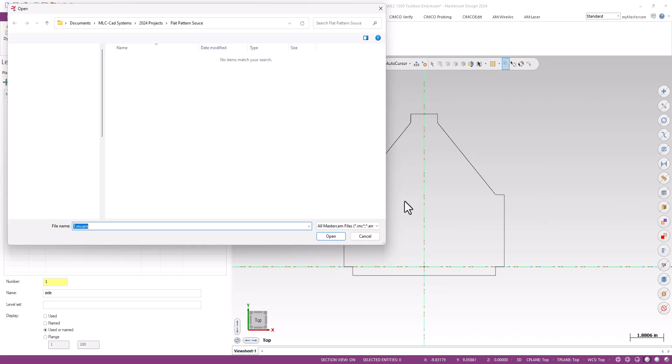So what I've got in front of me is just Mastercam 2024, and I'm going to go ahead and drag and drop in the first of our DXF files. It looks like that's the side, so I'll call that the side of the part. We'll do some level organization while we're doing this. From here on out, I'm just going to do a merge and merge in some more files. So we're going to look for some DXF files here.

We'll go for the handle next, and I'll just merge that in. I will bounce it off to a different level here. If I don't do it here, I can always shuffle it around in my level manager, but if I can remember, I'll do that. I'll just offset those by 1, and we'll bring that in. And that ends up on level 2. That looks pretty good. Or level 3, I should say.

And we'll merge in the third and final of our patterns, and that would be the tray itself. Perfect. Again, we'll just offset that by 1. We'll green check, and then I'm going to save this as my source file. Now, I didn't get quite the level distribution there, so I should have offset that by 2. But that's okay. I've got an extra level here, and I can simply grab one of those pieces of wireframe and move it to the level that I want it to be on.

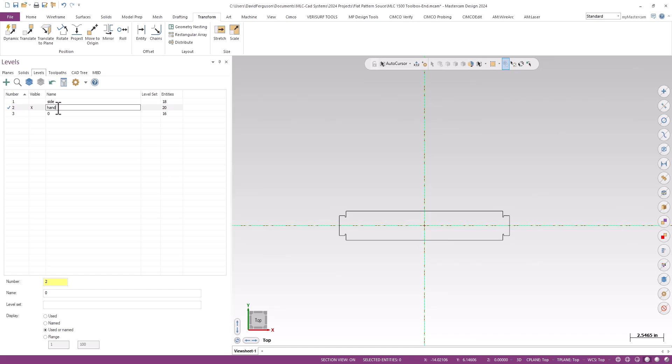There we go. And that would be the handle. Just doing a quick little label here so I can keep track of this. And then I believe that would be the base. Perfect. Now, I'm going to keep these on separate levels, and I'm only going to have one level turned on at any given time. These DXF files are flat to my top XY plane, so that makes programming them relatively straightforward. I don't need to do any translations or moving these around. I just need to keep the levels organized, so I'm only programming one at a time.

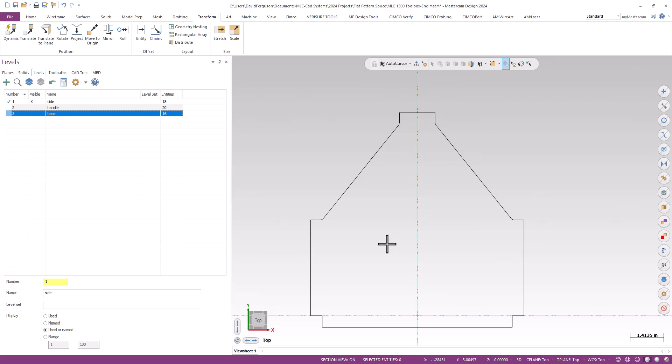What we're going to do is create a simple contour toolpath for a laser, water jet, or plasma style of cut. So I need to pop over to my toolpaths manager on the left hand side, go up to my machine tab, and pull in my Mitsubishi laser. We'll let that populate. Basically it's a mill, except it outputs for a laser. So we're using the standard milling toolpaths, so things like contour is what you'd use here.

Now for this, I want to set a specific entry for this toolpath, something I'm going to need to do for all 3 of these before I save them out as source. So in my level manager, I'll make sure that I am on the correct level, and I'm going to go up to my wireframe ribbon. I'm going to create a point position. I'll just make sure that I'm making regular points, and I am.

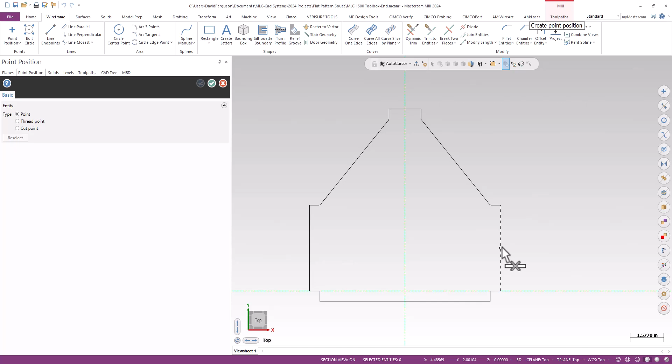Go up to point position, and then I'm going to hold down my shift key right here about the midpoint of this line while I click. So shift click, which brings up my little dynamic gnomon. I can grab that and move it, let's say a 1/4 inch or a 1/2 inch. I'll go a 1/4 inch, positive X, enter, enter, enter. And then that point actually gets placed relative to where I clicked.

Anytime in Mastercam, for quite a while now, if I need to locate a point, or locate an object or a depth based on a point, if I shift click, I can then use that gnomon to adjust relative to where I'm going.

So now that I've got a good sort of entry or burn-in point for my laser, since I don't want to start it right on the edge of the part or that contour, I'm going to pop back over to my toolpaths manager. I'm going to go up to my toolpath ribbon, and I'm simply going to grab just a simple 2D contour. This is a profile, burn, or cut, however you want to call it, and that's really all I need there.

So I'll go ahead and start off with a contour, and since I am using an entry point, I'll start with a point chain, and I'll select that point that I created. Then I'll switch to just a regular closed or looped chain, and I'll put a clockwise motion on there. Okay? Now I'll make sure in my lead in, lead out that I'm picking up that entry. I might have to adjust the start point otherwise, but we'll see what we get. I'll go ahead and say OK.

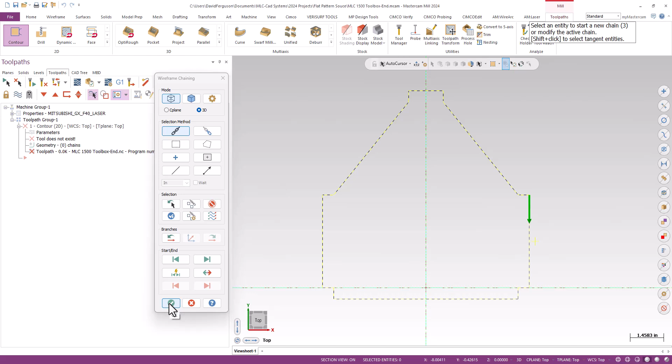For a tool here, I don't have a special tool is what I'm getting at here. So I actually need to create a real simple tool here to sort of mimic the diameter of the laser, or the nozzle of the water jet, or the diameter of the plasma, just so I get a realistic view in backplot and verify. So I'm just going to right click and create a very quick tool.

This will just be a flat end mill, and believe it or not, the cutting diameter of this tool is going to be 4 thou. And if I zoom in, it is there. There is a 4 thou tool that's going to, again, mimic what my laser looks like. I'll just give it a slightly better name. I'll just call it laser. You can get more specific down the road if you want to, but we'll just call it a 4 thou laser. Okay, perfect.

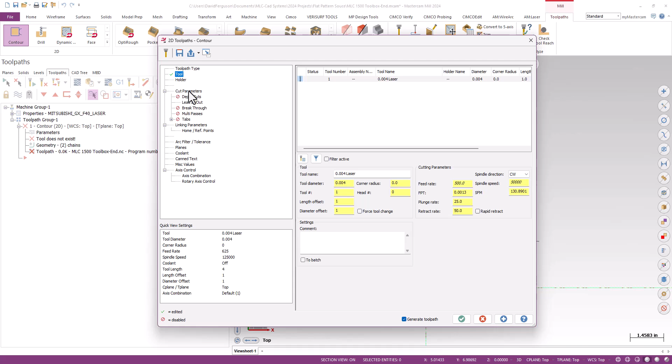I'm going to go down to my cut parameters next, and I'm just going to set this up as a real basic 2D contour. So computer comp is fine, comping to the left, 2D contour, no stock to leave on the walls or floors. One thing I can do with a laser is I no longer need to roll the cutter around sharp corners. Not as much a concern. So I'll just put that to none. So I'm okay making my good 90-degree corners. No depth cuts, no breakthrough, no multi-passes, certainly no tabs.

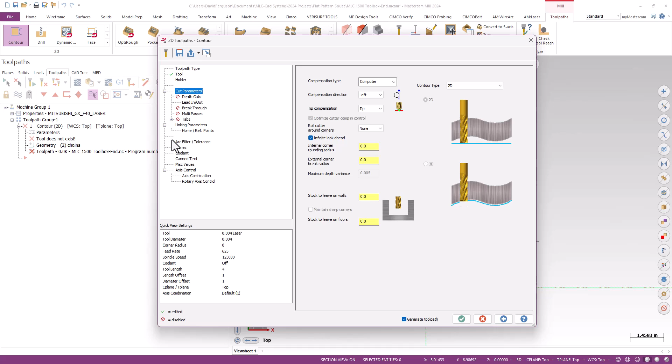And I do need to look specifically at my lead in and lead outs. So I'm going to turn off the exit entirely, and I certainly don't need any overlap. And I do want to use an entry point. Since I chained that, I want to make sure that the toolpath is picking that up. Now, I'm fairly certain that I placed the point to the right of the midpoint of that line. So I'm going to leave enter and exit at midpoint on closed contours turned on to see if I get a straight across move there. If that's not working, I can just adjust the start point relative to that point, so I'm not moving in in a diagonal motion or an undue amount of distance.

Finally, for linking parameters, for the most part, top of stock and depth can both be at 0 and incremental. That's perfectly fine. Feed plane and retract just need to be high enough to make sure that the nozzle or the aperture is going to clear anything on the top of that table. And 200 and 250 thou should be plenty. This material is not terribly thick.

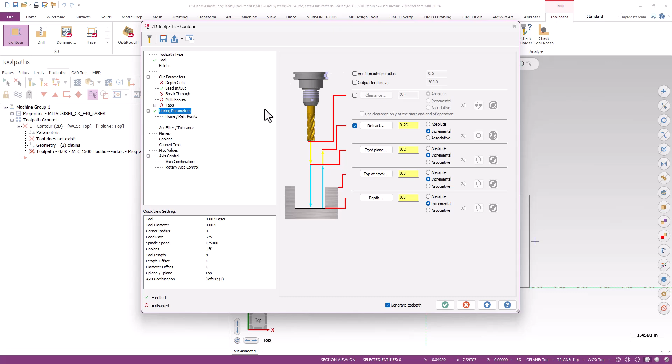So I'm going to go ahead and generate this first toolpath just to see what that's going to look like. I do believe I am seeing, if I zoom in here, yeah, I'm getting a nice straight move from my burn or entry point straight over and then into the contour. And that's what I wanted to see there. I'm not moving to the start of that entity. I'm moving right to the midpoint. So that looks pretty good. Again, I'll do a quick backplot on that.

I'll turn off my holder since it's slightly blocking my view and might make the tool hard to see. We'll step through backplot really quick just to make sure we're tracking. The graphics will tell you even if you can't see the tool, and that looks pretty good. Very satisfied with that, so we'll exit backplot.

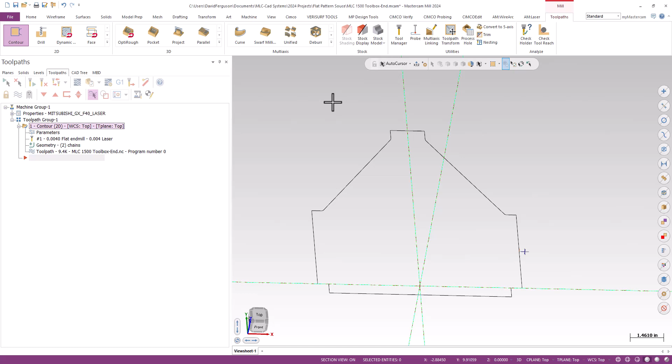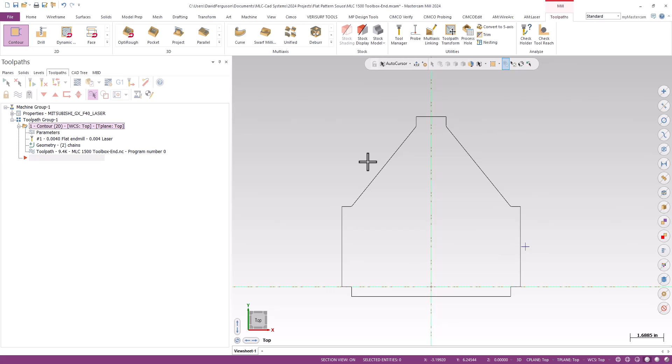I'm not going to post out code or anything specific. What this is going to be is a source file. The actual nesting, when we're determining quantity and all of that, happens in another part file - this one is just to get me going. The nice thing about source file programming is, down the road when I have to do another sheet or another run, I have all those source files available, and I'm just determining quantity and priority for how many of each I'm going to need.

So with that toolpath saved, I'm going to do a file save as, and put this right back where I got it from. I'll call this one the end piece, and tag it as a source so I can find it again easily. There we go, and I'll go ahead and hit save.

Now what else I'm going to do is leave this toolpath as is, and just do some quick rechains rather than rewrite. This part file is all about generating those source files to use later. So I'm going to go to my levels manager and switch over to level number 2 - that's my handle. I'm still seeing the toolpath from the other one there, so I'll make sure that's my active level, then go up to my wireframe ribbon.

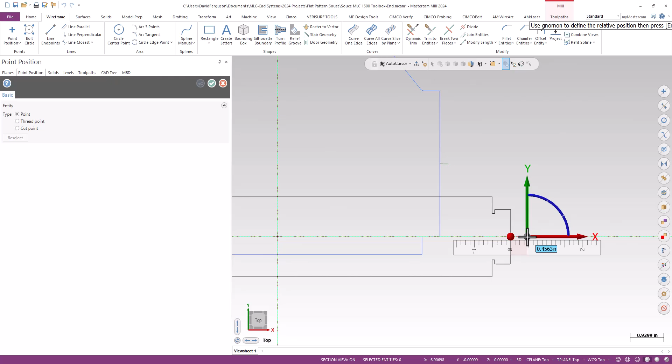Again, a point position, and I'll do that quick shift click since that worked okay. We'll go about a quarter inch positive in X, and there we go - there's my burn-in point. Now since I've got this first toolpath all sorted out, basically all I really need to do is rechain it.

I can do that a couple different ways. I can click on the geometry button to get to my chain manager and rechain there, or I can go into the parameters for the toolpath, go up to toolpath type, and click chain geometry there - either way gets me to the same place. The toolpath will have to regenerate anyway, so it just depends on how you like to do that. One has automatic regeneration, the other you'll have to click one of the regen buttons. I'll probably do the first way.

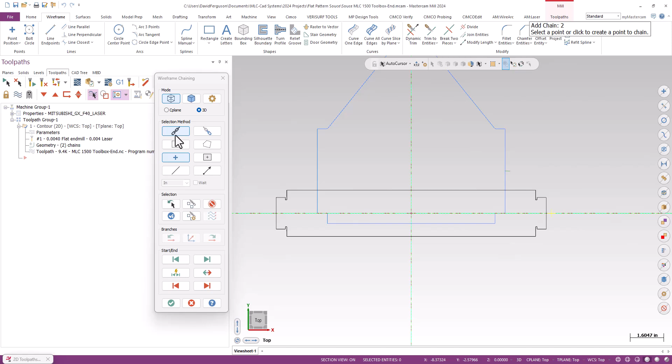So here I'm just going to right click and basically rechain all, dump the originals. Second verse, same as the first - we'll start with a chain point for my entry point, then switch to a clockwise closed chain around the DXF perimeter there. I'll go ahead and green check, and then green check out.

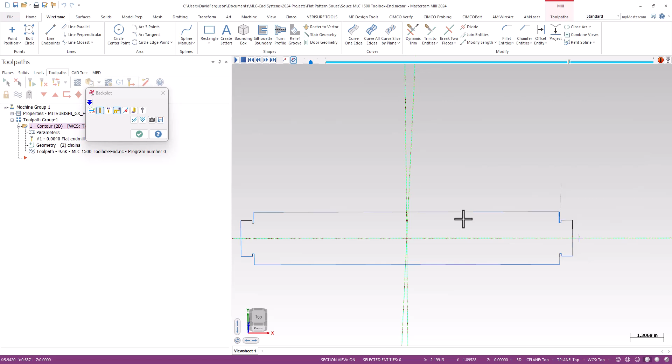I should see, if I look at that real quick in backplot - I'm just tapping my S key on my keyboard - we can see we are moving around that pretty good. A little hard to see the tool again, but it is there. That looks pretty good, all right.

Same kind of thing - I like that cut, so I'm going to do a file save as, putting them right back where I got them. I'll make sure I call this one the handle, so I can keep them straight down the road, because you will forget them - I know I do. So I now have that handle as a source file.

Switching back to my levels manager, switching now to the base. I'm still seeing the toolpath from the other one, but it's fine - it's just distracting, but it's not hurting anything to have it there. I'll make sure I'm looking at just the DXF file for the base, which I am.

Again, that is my active level as well, so I'm making sure I'm putting everything in a place where I can control it. Go up to my point position.

Again, shift click at the midpoint here, about 0.25. I suppose I could have used that point I created before, but I do like to keep associated geometry for toolpaths separate and together with their own kind, so to speak, just to make sure I always know what I used for any given toolpath. So for this last one, I'm going to pop into the geometry button here instead of parameters, just a faster way to get to the chain manager.

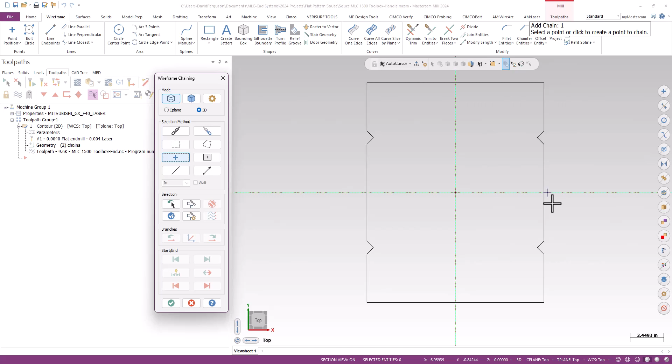Again, I'll do a quick rechain all, starting with a point and then switching to a closed chain to go clockwise. Green check. Now that toolpath won't regen automatically because I did that outside of the parameters, so I need to click one of my two regen buttons. I'll just click regen selected, and that regenerates that toolpath pretty quickly.

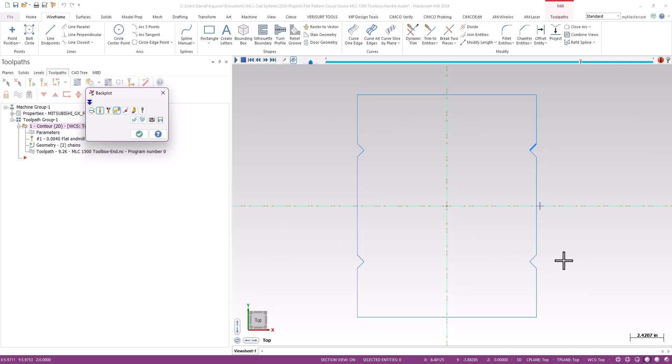Again, I'll check that very quickly in backplot just to make sure I'm happy with the toolpath, tapping my Sierra key, and you can see here we are moving around that. Hopefully that shows up on the screen, and that looks pretty good. So again, happy with it. All three very consistent toolpaths, basically the same toolpath, just rechained for three different basic outlines.

So this one, we'll go ahead and do a file save as, and this one I will change the name a little bit to base, just so I can keep them straight. And at this point, what I may choose to do is go ahead and do one more file save as, and save this sort of as the project master, toolbox master, master source, something, so I know this is kind of where everything originally came from.

I should probably spell that right, though. Try to spell correctly, guys.

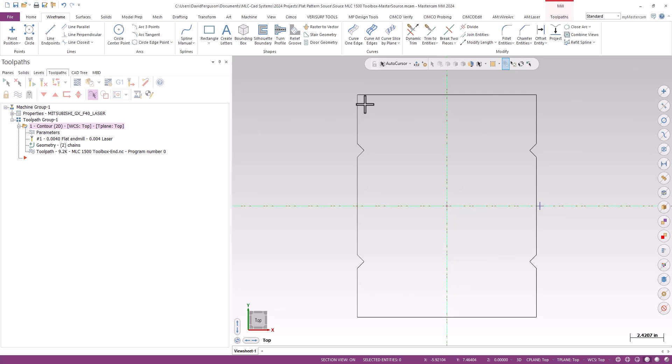All right, perfect. So now that I've got that done, basically I'm done creating those source files. So I'm going to switch over to a blank and empty session of Mastercam. I'm going to go ahead and load up my machine. So there's my Mitsubishi laser.

Okay, I'm not going into the machine group properties yet. I'm not selecting any tools or anything. This is going to be set up purely as a nesting operation. So once I've got a machine loaded in, I now have my toolpath nesting function available for mill. Yeah, even though this is a laser, it's still the mill module we're doing this in. So I'm going to go ahead and click on my nesting button here.

And the first thing it's going to ask me is to define the basic sheet. We'll just do 96 by 48 because that's just sort of the standard, and that's fine. But again, you can have all kinds of preloaded sheets in here that you need.

Grain direction, I can choose to ignore or have horizontal and vertical. So it just depends if this is wood, if this is metal that is grain dependent, and you want to stick with the grain lines up a certain way in the sheet, you can have that. So I'm just going to leave that at ignore for right now.

Nesting corner, in this case, will be the lower left, but again, I can set that to any of the square corners of my sheet, just depends on where I'm touching off. Most large tables or gantry machines, it's lower left, that's pretty common. Multiple corners, in this case, off.

A fill direction. Sheet to sheet distance, if I've got multiple sheets, is there a space between those sheets that I need to take into account? And of course, a sheet margin, so how close to the edge of the sheet am I going to allow the nesting to work? We're going to go ahead and just put that at 2 inches, just to put a big number in there so we can clearly see that being applied, right? So again, this is just about defining what my sheet's going to be.

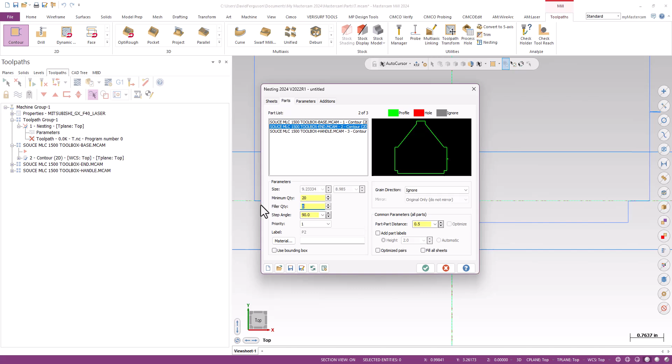For the end, obviously there's 2 per box, so I'm going to need 20 of those. Again, grain direction I can set while I'm there. Part-to-part distance carries over.

For the handle, I'm going to set the grain direction just to show that it's working. We're going to make all the handles horizontal - actually, let's make them vertical, that they might fit better, just to see if they show up laid out vertically. And again, for those we're going to need 10.

So once I've got some basic quantities determined, I'm going to go ahead and hit my green check here to see what that initial nest looks like.

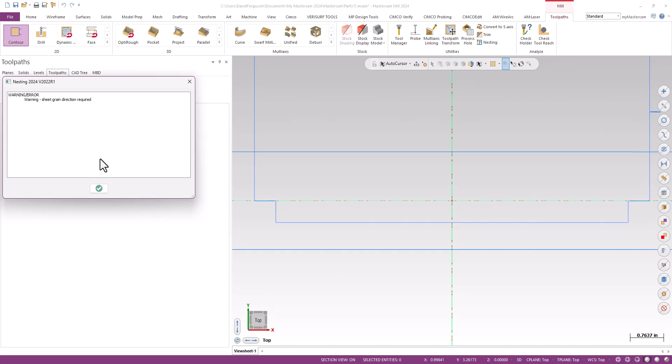You can see I made a little bit of a mistake here - I told that one part the grain had to be vertical, but I forgot to say the sheet actually had a grain direction. So we'll put that to vertical as well, and then we'll see what that looks like. We might have to fiddle that, but let's see what we get. There we go.

Now that put everything on 2 sheets, so I didn't get quite the yield I was looking for - a few too many. So I'm going to say, hey Marcus, we can't get quite so many out of there, so can we make 5 of those? Or Marcus says we've only got 1 sheet, so I guess we're making 5. The point being, I'm not married to this - this is just my first attempt, so I can redo my nesting if I'm not satisfied. Basically, the thing is, hey Marcus, it's not working so great.

I also noticed that our handles were not pointing up. So I'm going to put that to horizontal and still my handles to vertical, and we'll kind of see what that does. So you just kind of fiddle around a little bit to get what you're looking for.

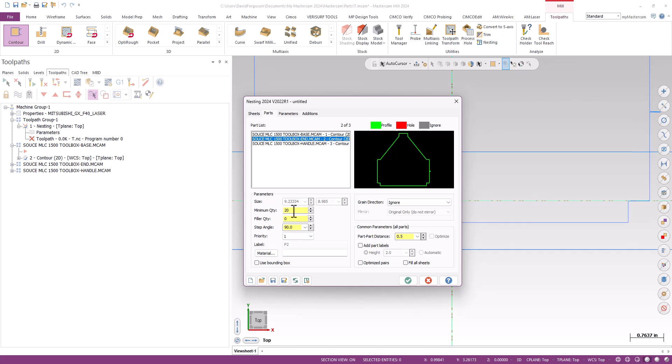So we'll go for 5 of those. Now we'll go for 10 of those. Probably should have realized that wouldn't fit, but that's okay. We're just kind of going through the process here to show you that even when you get down there, you're not done. And now we are getting those handles to lay out vertically. So we do have some control over that. And that looks pretty good. I'm pretty satisfied with this.

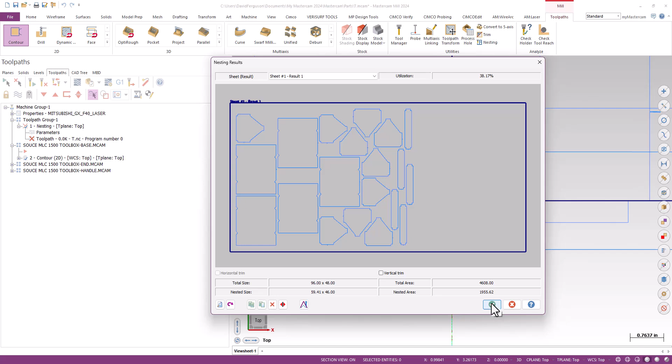Now, I can't remember for the life of me how thick this material was supposed to be. I think Marcus probably remembers, but I think it was about 30 thou or so. Again, I'm pretty happy with that. And I can save this as its own unique part file. We'll call this nest test 2 for starters, since I think I already have one, just so I have it saved.

If I do want to look at this in Verify, I can go in and use that laid out sheet as some stock. So we'll do that real quick and see if we're happy with this. I'm going to pop into my stock setup, and I'll just use a basic make from 2 points. We'll grab 1 corner there and then 1 corner there, and that gets me my 48 by 96. And then I'll put a little thickness in it.

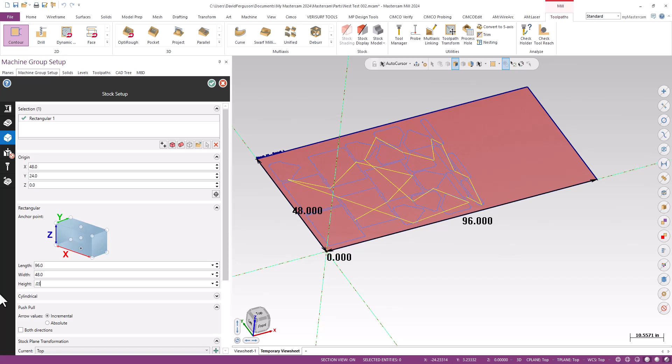I'm at the top. Actually, we want to be at the bottom for that, so it's poking up. So the 0 is at the bottom. And we'll put 30 thou. Again, I think that's the thickness; Marcus will probably correct me if I got that wrong. So with that done, I'll pop open Verify and take a look at those cuts. It's a very thin tool, so I'm not sure how much we're going to see.

I do get a little error there with my collision tolerance because the tool is smaller than my collision tolerance. So that's fine, nothing to worry about. And we can take a look at that cut. It's kind of small, so there's not a whole lot to see, but it did a nice job of popping those guys through. And yeah, I'm pretty happy with that.

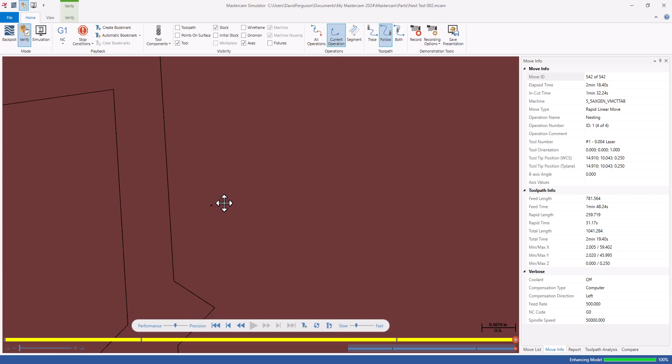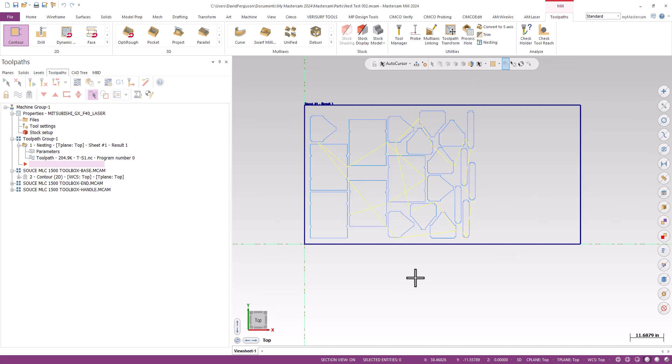All right, guys. So that's the first half of our presentation, talking about nesting. Kind of a traditional nesting approach there. Real thin sheet, high yield. Even though we're doing it on laser, if this was a router or a water jet, these are things we can expect to be asked to do. And the nice thing about doing it this way is at any point I can do this over. I can go back into my nesting parameters, play with the quantity, play with the sheet to sheet distance.

I can add more parts if they say, hey, we got some other stuff we want to throw on the sheet since we've got some leftover room. You can evolve this; you're not married to the initial programming, so to speak. This is all here for you, and very repeatable very quickly. The ability it gives you to do this again and again with different quantities, different parts, is just a really nice way for that to all work.

Okay, so for our second example, the CAD guys got to use a part that they kind of grew up with, that toolbox. And I thought, well, I want to use a part that I grew up with. One of the early parts I was ever asked to program. Those of you that can guess where this thing came from get some extra bonus points. I'll tell you in a sec, though.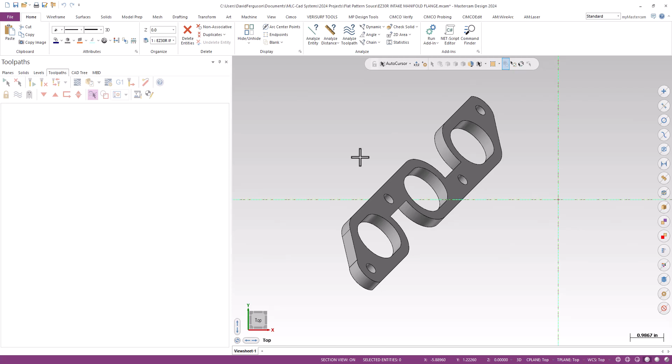So this is a solid model of a Subaru EZ30 intake manifold flange that someone asked me to CAD up and then mill out many, many years ago. I think I've still got one floating around somewhere. Basically, they said, here's a piece of aluminum, here's the part, can you get as many of these out of it as you can? At the time, I really didn't know about toolpath transform, and certainly didn't know anything about nesting. I had to do a lot of that manually.

And it ended up being, not a chore, but I kind of felt like I was doing it the hard way. So what we're going to do here is we're going to talk about nesting as sort of a milling application rather than just really a router application.

Because one of the things I can do with nesting, and this is sort of similar to toolpath transform, but again with Mastercam we always like to look at different ways to solve the same questions or problems, is nesting allows me to nest what are called clusters, which means I can do more than just contours. I can do more than just the occasional hole. I can group and link toolpaths together and kind of try to do them across an area and get the biggest yield and, again, try to do it as efficiently as I possibly can.

So what we're going to do is we're just going to set this guy up for a couple of quick milling toolpaths. We'll do a quick contour around the outside with some tabs. We'll do the 3 pockets and we'll go ahead and knock some holes through it as quickly as we can. When we do the pockets, we'll take a side journey a little bit to talk about arc filtering, and then we'll just see if we can nest all those clusters together on a big sheet, just kind of for fun. But remember, the sheet can be as big as you need it or as small as you need it. So your sheet can be sort of your stock when we get to it.

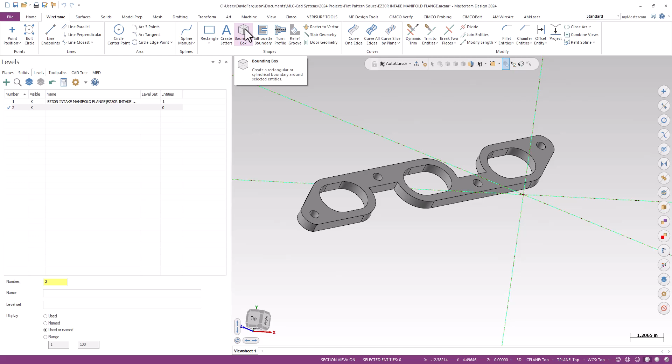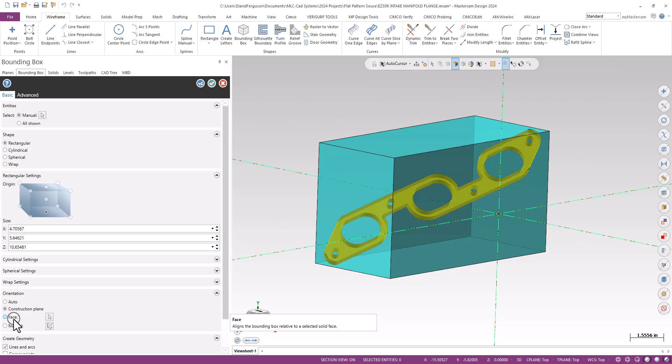So I'm going to go ahead and fire off a bounding box, select the part I want to throw the box around, and I'll hit end selection. Of course, at that point, the part is still off in space, so the box is, I don't know, my boss wouldn't be too happy with that as far as an efficient use. But on the left-hand side of my bounding box utility, I do have an auto function, or if that doesn't work, I've also got a manual and a solid face alignment tool. But I find the auto function works pretty well.

If I just click the auto function, it's going to go ahead and look at the solid or my selection and try to line the box up as best it can. And that did a really good job. So I'm going to go ahead and create this as lines and arcs. Again, this box is just for alignment purposes, and there we go. I'm just going to want to get this into my basic top plane so my programming can be a little bit more consistent than wherever I am right now.

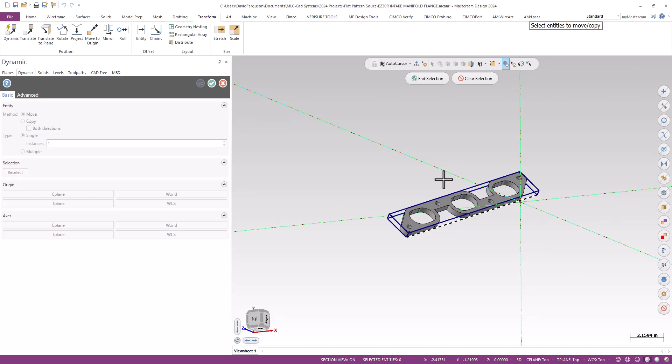So I'm going to go ahead and jump up to my toolpath transform. My entity transform, my transform ribbon. I'm going to grab a dynamic transform over there, give that a left click, go ahead and window select everything. Go ahead and hit end selection up there at the top. While my gnomon is sort of off in space, I'm going to give it just a left click to park it. And of course, if I pick it up and move it, the box and the selected entities go for a ride.

And I don't want to do that. I want to align the gnomon to this box first. Down and to the left of the gnomon always is sort of the secret gnomon button. That is the align or move mode button. When you see the little cube and the sphere, that's in move mode. So again, when I pick it up and move it, whatever's selected goes along for the ride.

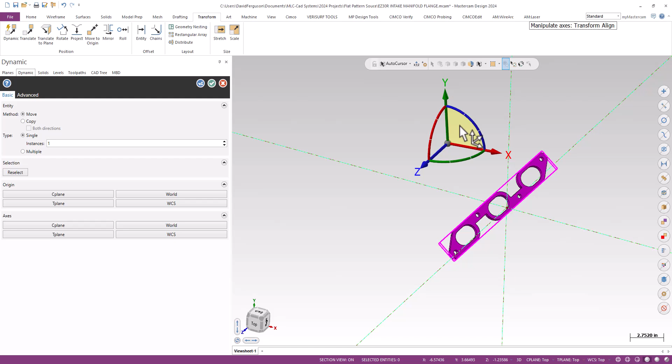I click that button. I see the little gnomon there. That puts it in alignment mode. That means I can move the gnomon around and my part doesn't move. So I'm then going to click between the X and the Y arrow. That's the only one of those that lights up, and that's actually a button, and that's the button that allows me to locate Z by finding a flat place or solid face or surface to line up and park X and Y.

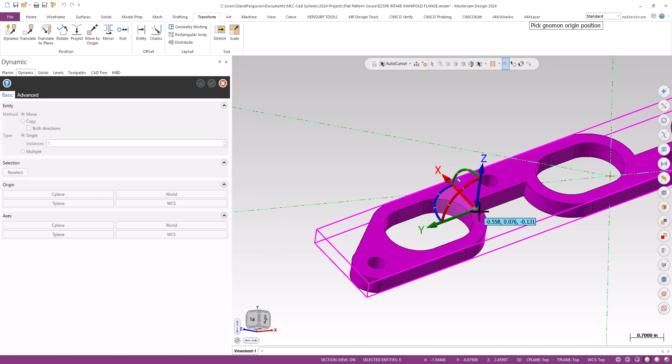So I'm just going to bring it up onto the top of my part. You can see X and Y are flat or planar to that, and Z is pointing straight up. So I'll give a left click to lock that in. And as I move that around, that's there. So then I'll just bring this up to one of the corners. I'm going to go to this bottom left corner here, since that's kind of where I want to align it anyway.

And I'll go ahead and align either X or Y, in this case Y, to my bounding box itself. And if I've already got Z aligned and I've just aligned Y, then X by default is also aligned, because 2 out of 3 is all I need. So at this point, I'm going to hit the move button again. And then I'm going to use some of the quick buttons over here. I call them the cheat buttons, but they really work great. Basically, these are quick origin or quick translate buttons.

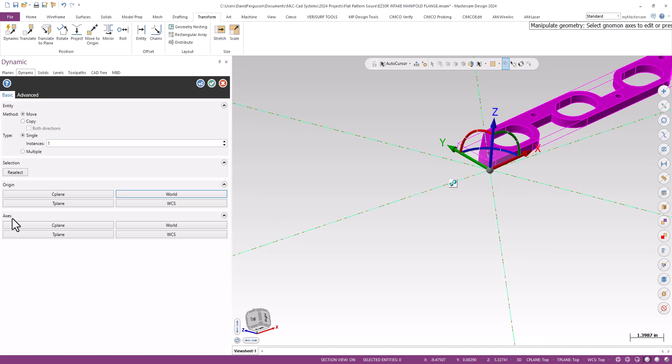So origin to world, which would be top, basically move to origin, and then axes to world, align the part to my top plane. So if I come down here, click on my top plane on my view cube, which you can do these days, I can see the part is pretty much squared up to whatever plane I choose, either C plane, T plane, WCS, or just world, which tends to always be top. So that looks great. So I'm going to green check. I'll clear out my colors, and then that part is exactly where I need it to be.

So I'm going to pop on the left-hand side, and go up to my toolpath manager on the left. I'm going to go up to my toolpath ribbon up top. Well, actually, technically my machine ribbon, because I do need to load in a mill. And I am just going to grab Mastercam's placeholder mill, just their standard default mill. Again, whatever mill you're going to be programming these on, that's what you're going to use.

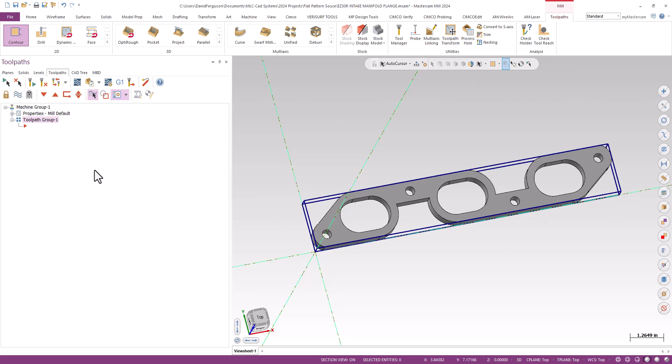Okay. All right, now for this, I'm going to start with the 3 pockets, and for that, I'm going to pop up to my toolpath manager, toolpath ribbon up top. I'm going to go to my 2D gallery, and grab a 2D high-speed dynamic mill. It's one of my favorite material removal toolpaths, and hopefully it's one you guys use as well. I'm going to go to my machining regions here, and do solids, because I only have the bounding box, and that's not for machining.

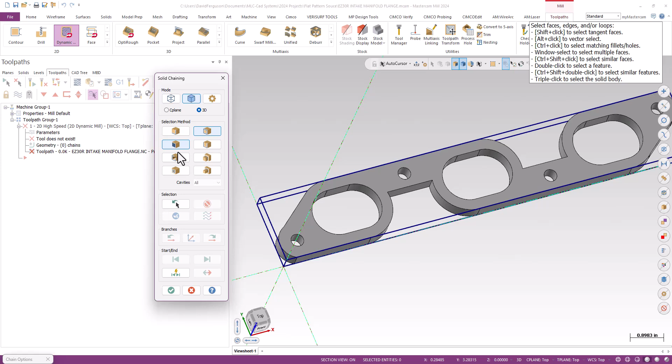And I'll just do loops, and chain on the bottom of those 3 pockets for those 3 loops. Again, direction doesn't matter, although I do tend to usually do them in the same direction. Quick preview chains, that looks fine, and we'll say OK and get into the actual toolpath itself. Now, I'm going to grab a tool, just a generic tool. I'm going to grab a 1/2 inch flat end mill, probably a little medium size for this, but that's what I want to use. I'm going to go down to my cut parameters here. Again, I've got my step over, my stock to leave.

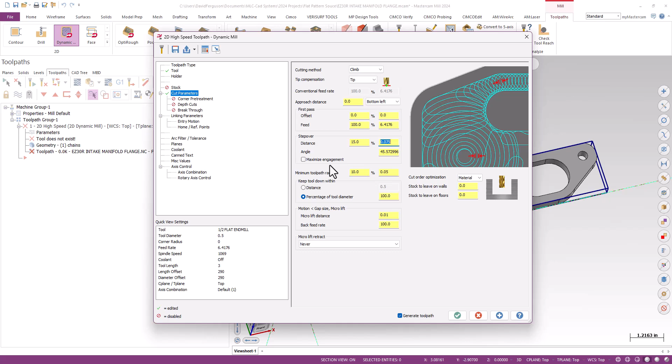They've told us that this thing is going to get shot peened and tumbled and powder coated, so nobody cares about the finish. So I'm going to zero out my stocks, so no stock to leave on the wall or floor. Step over distance, I'll drop down to a reasonable 15% for this. Shouldn't need any corner pre-treatment depth cuts. Breakthrough if you want it, sure. Maybe a little bit of breakthrough just to get through the bottom there. Again, it depends on how you want to program it.

Linking parameters, incremental and 0 for depth, since I chained on the bottom. That's where my depth is going to be. Top of stock, I will set to the top of the material or top of the part. That's 0.375. That's how thick our part is. No additional thickness to it. And then I'll just go ahead and make my feed plane and retract 0.2, 0.25 incremental, so they're 0.2, 0.25 above wherever my top of stock is.

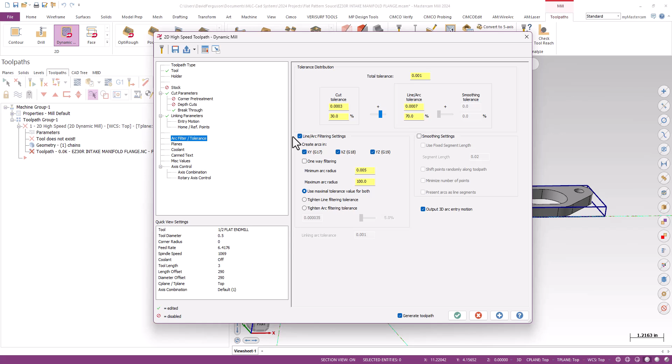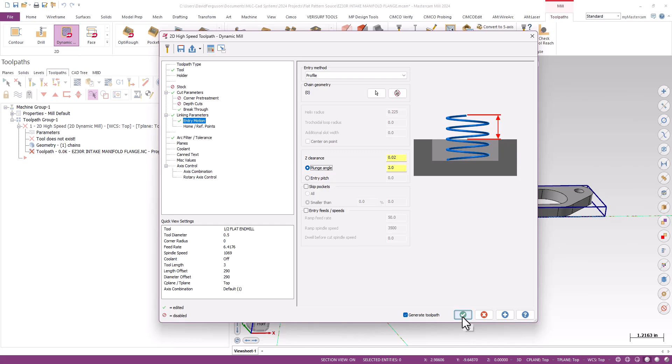Now, the other thing that we're going to look at, and I had to go turn mine off before I showed it to you, because mine's always on by default, and we'll talk about that in a second. So that's a pretty good looking little dynamic mill. I do need to get a bit of an entry motion, so we'll do a profile entry. It's my favorite. And Z clearance will go, again, maybe about 20 thou or so. Don't need to go crazy with that. We'll green check that. And again, I generate what looks like a pretty decent looking 2D high-speed dynamic for each of those 3 pockets.

Now, I'm going to look at that in backplot, and I'm going to zoom in. In backplot, I'll leave my tool off for a second so we can see the entirety of the toolpath. Leave rapids turned on. I am in trace mode up here, so I don't have to press play in backplot to see the whole toolpath. But I'm going to turn on this button here. These are my endpoints or my node points. And what I'm going to notice is that this toolpath is linearized. It's doing most of this motion with linearization.

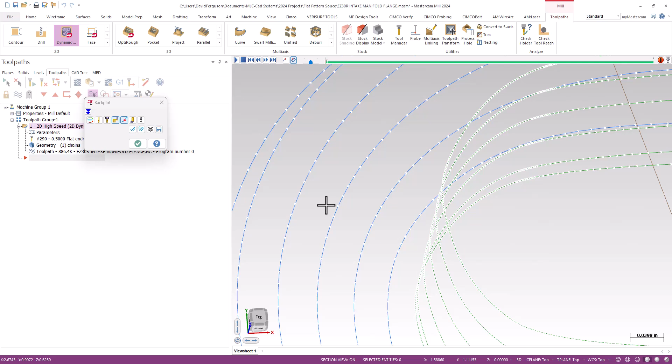Now we've got an entire video on this part just about arc filtering. I highly encourage you to check that out. To give you the basics, without using the arc filter here, dynamic toolpaths, so OptiRough, dynamic mill, dynamic peel mill, if you know about that one, can be linearized. They tend to be very code heavy, 886K raw toolpath data, and just not very pleasant to run. So we're going to apply my basic arc filter settings to this. And again, we've got a whole video talking about how all these work. Highly encourage you to check that out.

But to give you the short story, I'm going to turn on the arc filter. I'm going to allow arcs, and I'm just unchecking some stuff so I can check it again for you. I'm going to allow arcs in all three planes if my machine is happy using a G17, a G18, and a G19. So I'll check those three. Also check any entry or exit motion to make sure any 3D arc is not linearized. And then I'm going to take my 1 thou of total tolerance for that toolpath, and bias it more towards arc output than linear output. My settings tend to be somewhere between 20 or 30% of my cut tolerance for linear motion, that's usually in the tight stuff, and then the remainder for arc output.

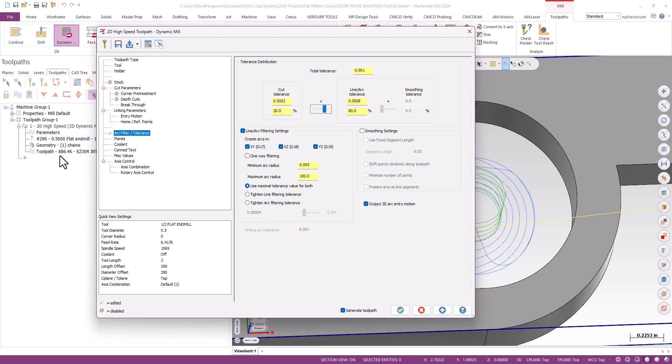Now, we're about 886K on this. I'm going to green check, regenerate that. The toolpath is now about 106K. And if I look at that again in backplot, you can see I've gotten rid of most of that linearization. That is a much smaller, happier toolpath that will take less time to get on my machine. Machine should be happier running that. And again, I'm covering the same distance, the same basic area. I'm doing it with less code, and with more arc output. So everyone should hopefully win with that.

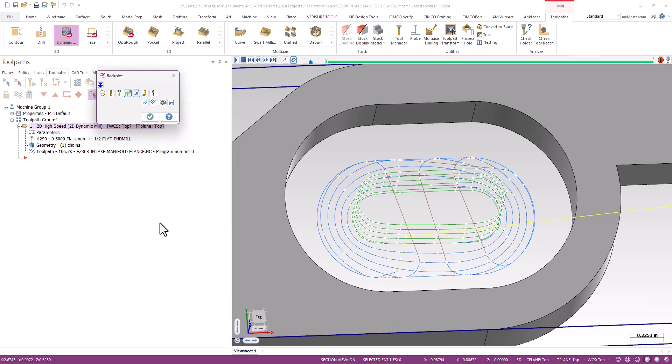If you're not arc filtering your dynamic or your trochoidal toolpaths, you really do need to, just to make them manageable in truth. All right, so that looks pretty good. I'm pretty happy with that. I am next going to go ahead and drill the holes. I'm going to use the new sort of selection technique. Now, I think the holes are a little weird size-wise, so we'll just get a tool that's kind of close. Again, this is more about process than anything else.

So I'm going to go ahead and pop up to, again, my toolpath ribbon up top. I'm going to expand, grab a drilling op, one of the two. They're identical, so just one of them. And then I'm going to go ahead and use a feature selection. And specifically, I'm going to use a control click to click on the inside wall of that first hole, or one of the holes.

And Mastercam is going to, with a control click, locate the other matching diameters on that. It's also plotting out the top and bottom of each hole based on that selection if I choose to use incremental values. And we've got a diameter 0.3543. Again, we'll find something close to that. I think these might have been metric. Who knows? The other issue I have is the sorting here is not so great. When you do a group selection like that, sometimes you end up with some odd duck distribution.

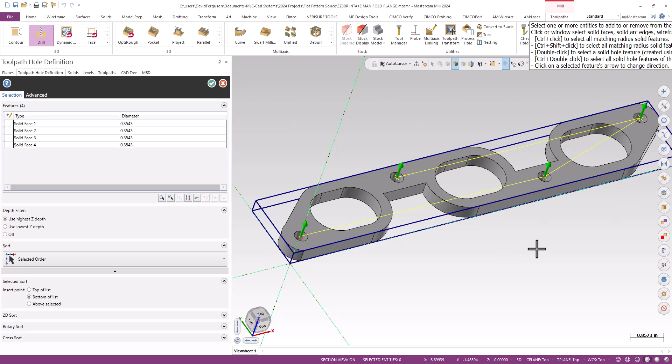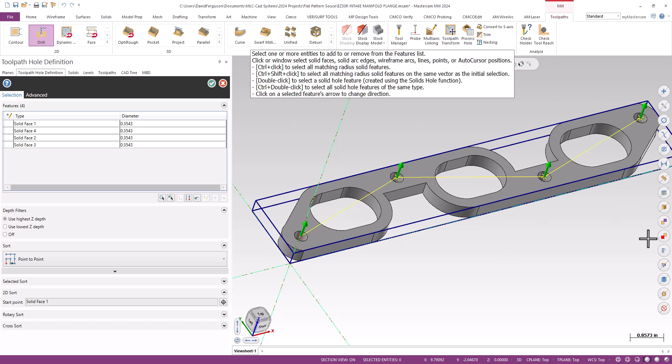So we'll just do a quick resort. I'm a massive fan of point-to-point sort. That's usually your fastest option. With point-to-point sort, I am prompted to select a start point. So you just kind of pick your first hole, and then it basically comes up with hopefully the shortest conceivable distance of doing multiple holes. If you've got quite a few holes, point-to-point's usually your best bet for that. So that looks pretty good. So we'll say okay.

All right, I'm going to pop into my tool page here. I'm going to go find, and I've already forgotten the size of that hole, 0.3543, okay. So we'll find something close to that. How about we go 0.358? We'll go with the T-drill. That's pretty close. We can Scotch-Brite it to get it up to tolerance. There we go. It'll be fine. Always a little slop in those anyway, right, guys? So yeah, T-drill, that should be fine for us.

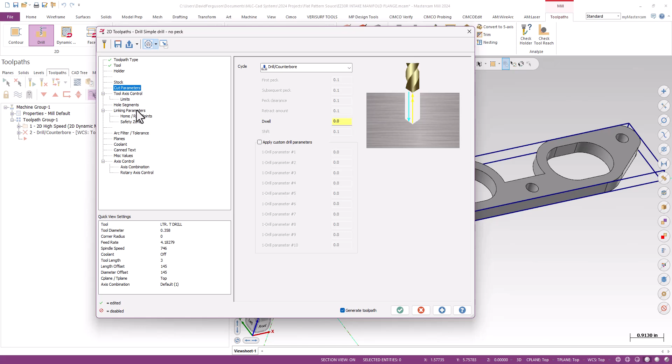I'm going to go to my cut parameters. Again, basically just choose my drill cycle based on what I'm trying to do here. We'll just do this as a basic drill counterbore. Again, nothing magic here. Tool axis control, 3-axis output. Linking parameters. Again, new for 2024. If you haven't seen this yet, this is pretty cool.

If I'm using axis lines, or I'm using the walls, what they call a feature or a face selection for these, and I use incremental values, depth incremental 0 is the bottom of the hole, incremental 0 for top of stock is the top of the hole, and then if I want to, retract and clearance can also be incremental, and those will show up there. You do have these color-keyed tabs out on your screen for each individual hole feature. These are interactive, so if I want to grab my retract and drop it down to 0.25, that'll do it for all of the holes relative. Very cool.

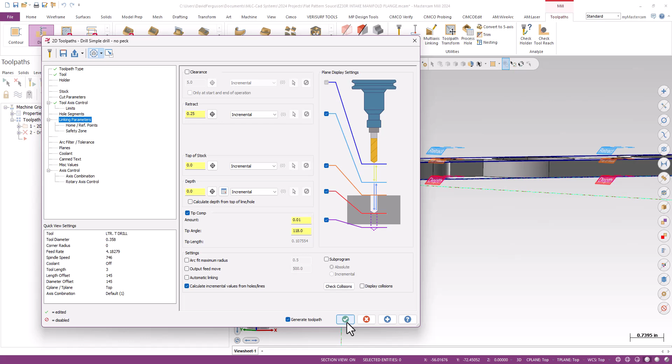We'll add a little bit of tip comp and a little bit of breakthrough there just to calculate. And that looks pretty good. So I'm going to go ahead and green check that. And that looks like we're getting that drill, and I should probably turn the drill back on, to the bottom of that hole. There we go. And just that little bit of breakthrough. So controlling the depth very easily with that. All right.

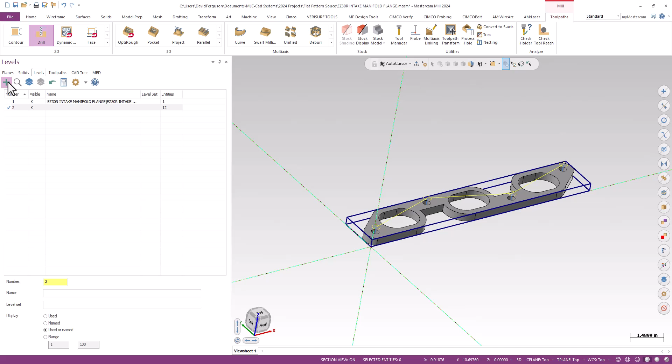So my next thing I'm going to do is create a new level. I'm going to do a little bit of profile machining with some tabs. So I'm going to call this profile with tabs. Now I have to use wireframe for this if I'm tabbing. Solid chains don't quite work yet for this. So on that level, I'm going to roll the part over on my screen. I'm going to go up to my wireframe ribbon. I'm going to grab curve all edges. I'm going to click on that back face.

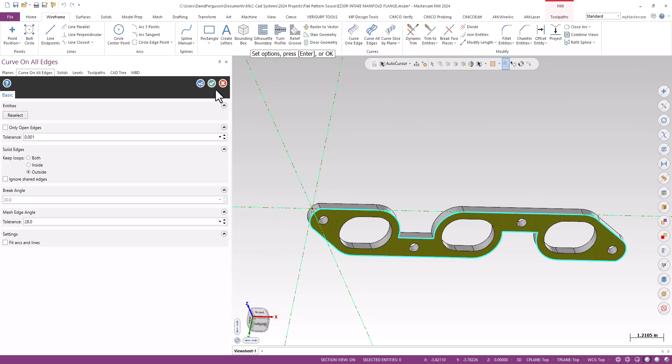And then over on the left, I'm going to ask it to simply do the outside perimeter, sort of like a silhouette boundary, but maybe a little cleaner. Does a pretty good job, and we end up, again, with a profile of the part. Lots of different ways to do that. Silhouette boundary also works pretty good, but that works for me.

And then I'm going to go up to my wireframe ribbon and grab a point position. But before I do that, in my point style, I'm going to right-click in my graphics window to get to my attributes bar. I'm going to change this to a square point style. Square points, just to kind of place one, that's a square point, if you can see that.

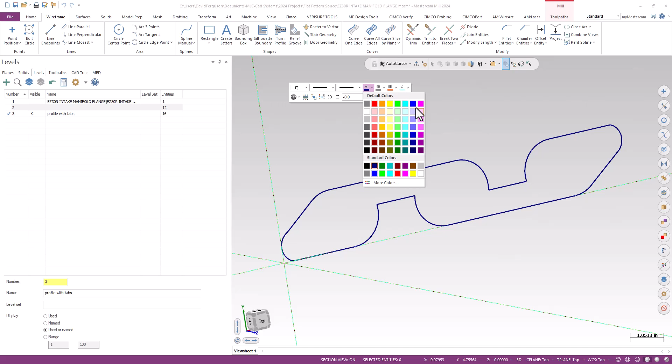Square points are what I use for manual tabs. So if I lay square tabs or square points along this part on this wireframe for a contour toolpath, that can trigger a tab. The best way to do that, once you're making square points, we'll make them a different color. We'll go ahead and make them red, just so they pop a little bit. I'm not sure you're gonna see that.

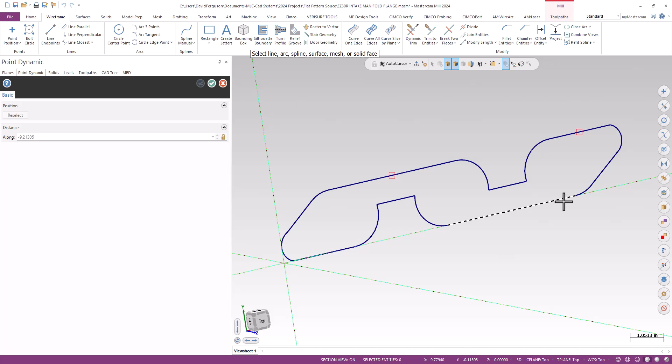Is to go ahead and use something called Point Dynamic. Point Dynamic allows me to select an entity and then basically move my cursor along that entity, and when I want to, I can left click and place a point there wherever I want to. Then I just simply kind of blue check and go to my next entity. Now I'm putting these all at the midpoint, so technically I could have done that manually, but it does allow you to place your points anywhere along that.

And one of the reasons why you want to use Point Dynamic is that's one way to ensure that that point, wherever it is along that entity, is actually sort of intersecting or connected to that. They do need to be sort of on the line, right?

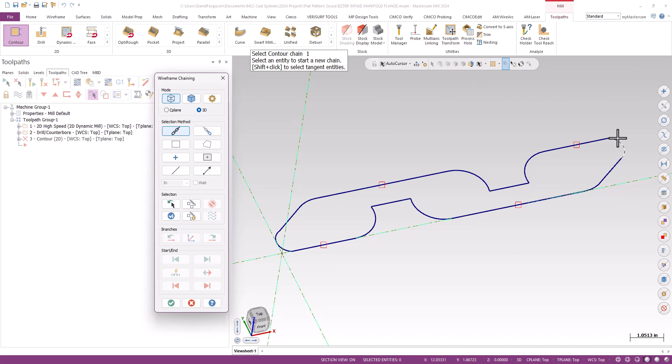So now that I've got that, I'm going to go over to my toolpath manager on the left. I'm going to go up to my toolpath ribbon up top, and I'm going to grab a simple contour. We're going to go ahead and go in a clockwise manner here, and I'm going to go ahead and start this, say, out on this sort of rad there. Yeah, so that should be a clockwise cut.

We're going to go to a slightly smaller tool. I think that 1/2 inch end mill might be a little large for that, so we're going to go down to an 1/8 inch, again just so we can get in there a little bit more. Your experience may vary, we'll see how it goes. Again, we're just trying to show you how to set up a basic tab run for a contour, so we'll just use that tool for fun.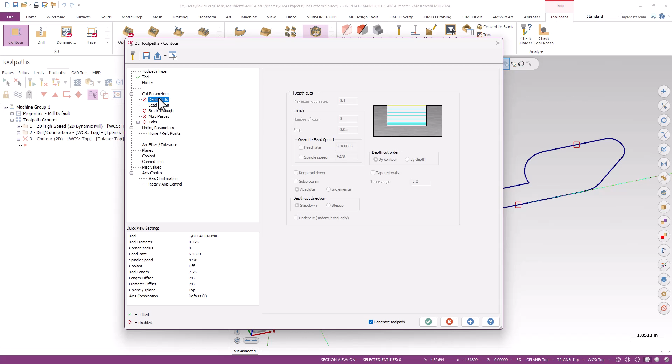I'm going to go to my cut parameters. Again, nothing I really need to do here, although I've got to watch some of the stuff from my previous operation, even though that was in a different part file. So, computer's fine, left is good, tip, roll around sharp corners, that's fine, no stock to leave on wall. Depth cuts, not so much. Lead in, lead out, that's all kind of back to normal. Enter and exit at the midpoint, that'd be right about there, that's fine.

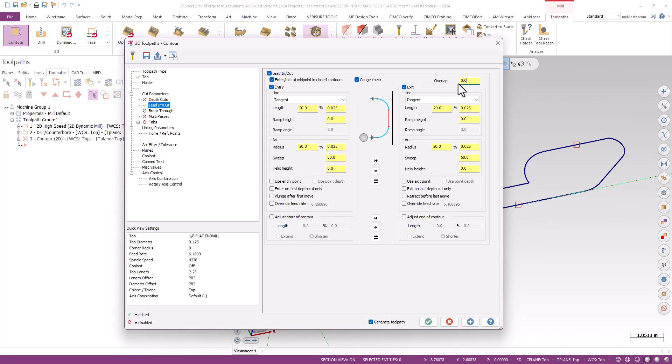Just a little large, so what we'll go ahead and do is just kind of shorten that up a little bit. I'm just going to make these a little generic, say a 20/20 with a 60, maybe a little bit of overlap. Nothing remarkable going on there. No breakthrough unless I want it. Again, multipasses if I want it, but tabs is what I am looking for.

So I'm going to go to tabs and turn that on. I'm going to set this up for manual tabs to use my midpoint, and use square positions or square points for tab positions. Partial tabs, tab width, ramp angle, tab thickness, kind of whatever you need for that. I'm going to put my tab width at 0.5, 1/2 inch, ramp angle 45 degrees. Again, tab thickness 20 thou, that'd be plenty thick.

Linking parameters, again my depth is going to be incremental in 0. Top of stock we know is a positive 0.375 from our last one. Again, feed plane retract, somewhere around there, the same. Then I'll go ahead and hit a green check.

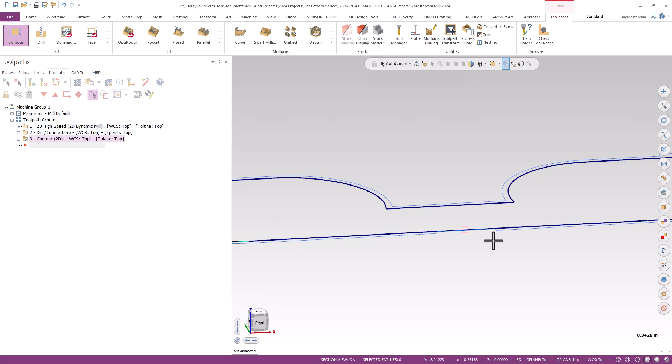Okay, if I zoom in and take a look, I can see those tabs there. You can see the tool actually lifting up where those square points are. So our tool is going to come in - I used kind of a small tool, and we can see those tab points right there. When I get to there, I'm going to hop up ever so slightly, move over, and then move back down. So that's my tab.

If I were to go back and manually move those points back and forth, the tabs would go with them. So I've got three tool paths here - three different tools, three different tool paths. Important to understand these all need to happen in the same position relative to each other. I don't want to split those apart. This is a single part.

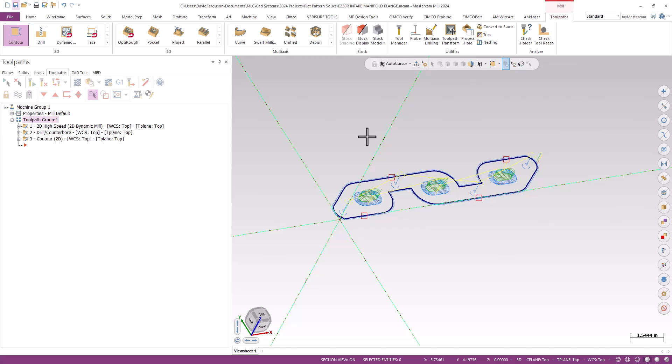So I'm going to go ahead and save this out, and I'm just going to hit this. Basically, I might tag it as source or something so I know where it is. But those tool paths are now saved. Okay, so what I'm going to do real quick - let me just check something on my bounding box.

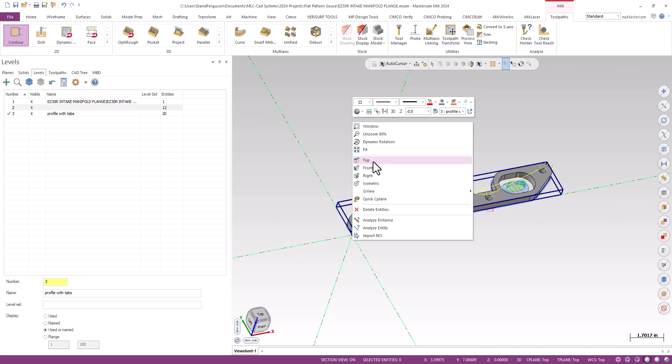So those are just a little over 12 inches long. Okay, I'm just trying to think. I think we're going to do it on a full-size sheet because it's fun. But again, I might want to size my stock a little more realistically. Although, just to show you what's capable or what's possible, we're going to do it on a giant sheet just for giggles.

All right, so I've hit save on this. That's now saved out as a source file. I'm going to go ahead and start again with a fresh one - just a fresh open session in Mastercam. I will go to my machine tab. I will pull in the same machine - again, just that placeholder default mill.

But having a machine there allows me to go ahead and fire off my nesting utility, which I will now do. Again, we're going to do this on just a large sheet because it's funny. We'll say grain direction is horizontal, so moving that way, lower left. I'll go to parts, and I'm going to go ahead and right-click in there.

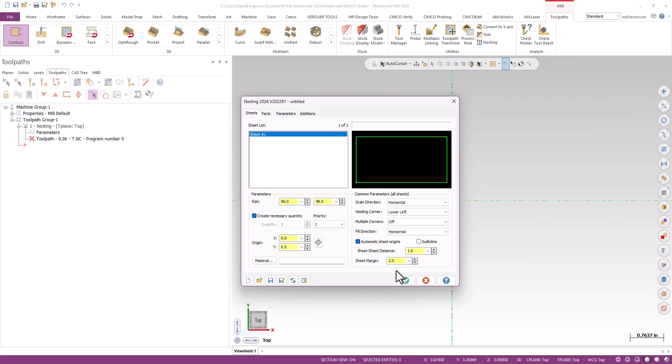Oh, sorry, my mistake. Yeah, sheet margin is still 2 inches. So again, some of these carry over from the last time I used this. So you got to watch for that, but that's fine.

Under parts, since I need those guys to stay together, they are operational clusters. Okay, and that's key. If I bring those in just from the file itself, just to show you what happens when I do that - if I bring them in just from the file, they don't stay stuck together, and that's not going to work, right?

It'll bring in the three tool paths, but it treats them as three completely separate things. And if I was to nest those out, they would just be wherever they happen to be. So we can't do that. They gotta stay clustered together.

So we're gonna add these as a cluster. And when I grab those in, we now get one part with all three of those tool paths applied to it. Okay, now we're gonna go ahead and ask for a minimum quantity of

30, just for fun. I think that should be good. Part to part distance, I'm going to bump that up to say 1 inch. I think that should cover everything. Again, we're just throwing some stuff out there. Grain direction, we're going to go ahead and list that as horizontal, just so I get a consistent direction for them.

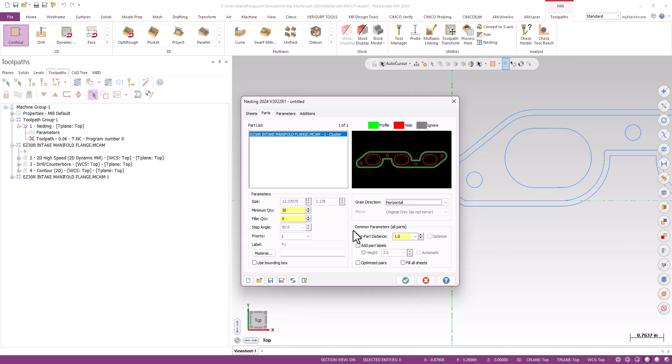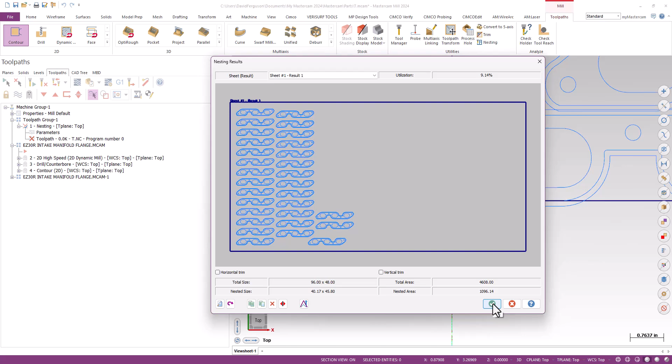And then I'm just going to go ahead and take a look and see what Mastercam comes up with. And there we go - there's a whole bunch of those manifold flanges, 30 of them, and obviously I can get quite a few out of them. We'll stick with 30 just so we don't drive ourselves crazy. I'm going to say okay, and that's going to come up with my nested operation there.

Now, is it doing every part together? Is it doing it by tool path? What is it doing? So if I back plot that, just out of curiosity, I'm going to turn off those node points because they're a little hard to see, and put it back in incremental or run mode, so it's a little easier to see where it's going. So you can see it looks like we're drilling the 4 holes first.

Okay, so now we're doing the outside profile. That's not going to work, because we're now going to leave those pockets for last. So it's doing them in whatever order it kind of made up its own mind. That's not going to work for us. So where do I control order?

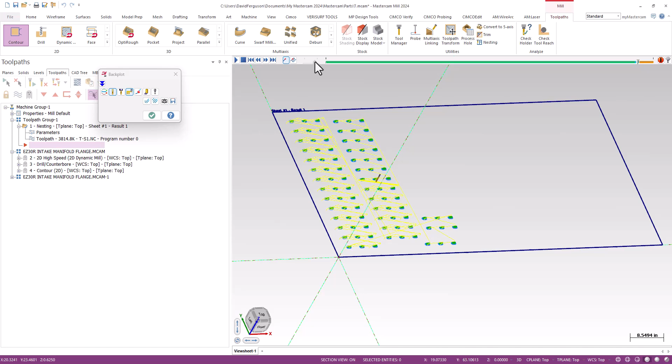Well, in the nesting itself, under parameters, we just never got to that. I wanted to go ahead and do it in the Toolpaths Manager order: pockets, holes, contour, the order in which they were originally created. And that should then do them pockets, holes, and there we go. There's pockets, so we'll do the pockets really quick, and we should then do the holes and then the contour. So you just kind of have to know where those guys are hiding to find that.

Now, even though this is a ridiculously sized piece of material, I'm not sure how you'd even get that on the table, I'm going to go do a quick verify on it just for fun, just so we have the satisfaction of seeing it actually run. But I think we're good. Again, sometimes we do funny things with scale, and I think that's 0.625 with the thickness, so that's okay. Sometimes you do abstract and big things just to get an idea of how something can work.

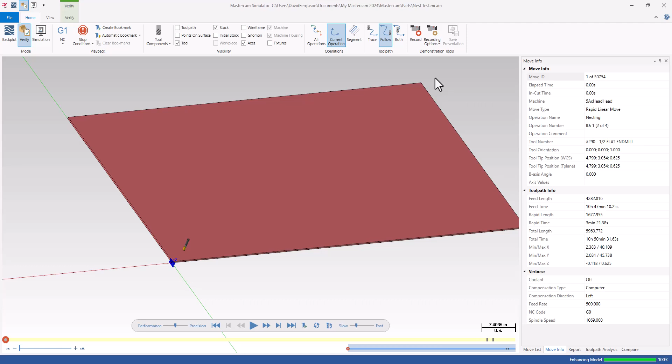Okay, and I'm going to save that. I'm going to call that nest test again, and I'm just going to overwrite whatever my old one was, probably the same thing. And we'll go ahead and grab our nesting routine and look at that and verify. Now, graphically, sometimes very large sheets can look a little funny once you zoom up, but we'll just go ahead and run those through real quick.

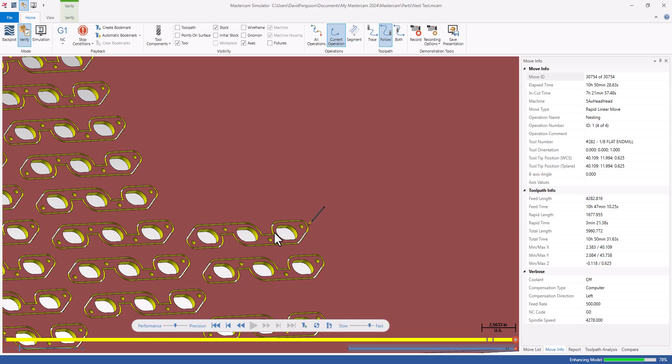Now, again, exaggerating the size of this material - if I've got a much smaller piece of material, or a long sheet, and I'm just trying to get as many of these out of that as I can, Transform sometimes asks you to do a lot of the math on your own. And what I like about using the nesting functionality is that you can evolve it, if that makes sense. I'm never married to anything. I can always go back and adjust things.

I can change the quantity. I can change the layout. I can adjust the size of the sheet depending on what I'm being asked to make that day. But the important thing is the parts are programmed, and they're just waiting for me to determine quantity. So once I've got a part programmed, and I know it's something I might have to make again in the future, as long as I can find that file, I can nest it as a cluster, or nest it individually, and basically just control my quantity and determine what my yield needs to be for that day. Really a nice, interesting way to program.

Definitely worth looking into. Definitely worth just experimenting with. Maybe it'll work for kind of what you guys do.